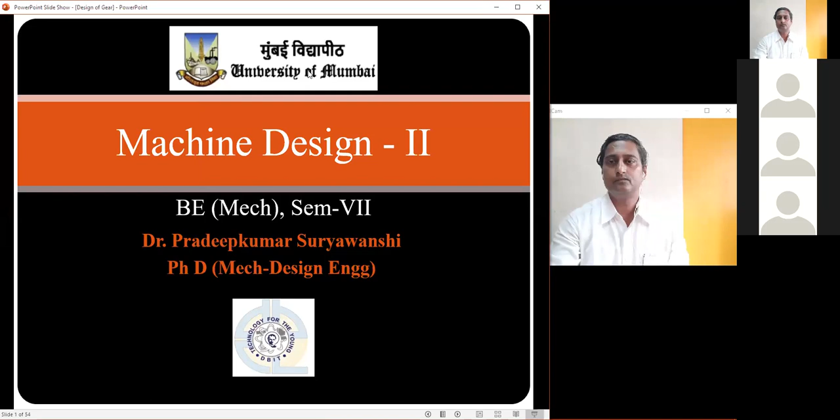Excuse me, sir. The video has frozen. Okay, let me just see what has happened. Yes, sir. Right. Okay, thanks for that feedback. Keep on doing this. Whenever I'm not audible or there is no video output, please let me know. That's fine. So we'll move on to my presentation now. Okay, that's fine. Actually I wanted to put this slide when I was making this introduction, but I just forgot. Anyways, we'll move on to the next slide. You can see my presentation? Yes, sir. Oh, it is not going. Yes.

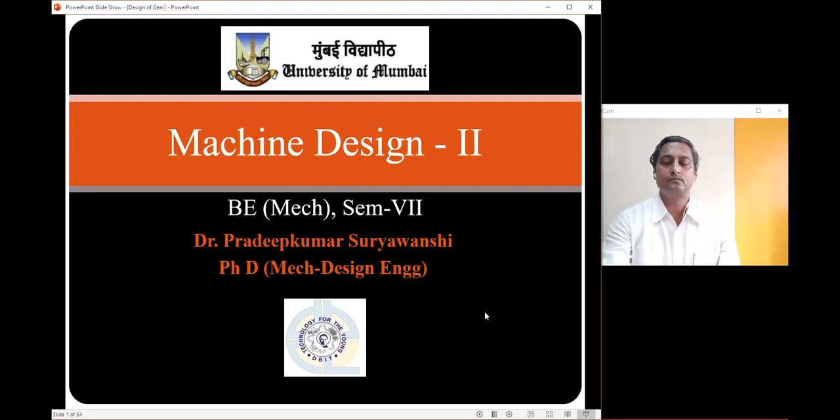Okay, so we'll just see what is the scheme for this subject. The course code is MEC 701, subject is Machine Design 2, and we will have 4 contact hours per week as a theory lecture for this subject. As far as the examination scheme is concerned, as usual we have internal assessment for 20 marks. There will be 2 tests; we will consider the average of that, and there is an end-semester examination of 80 marks for 3 hours. So in all, there are 100 marks assigned to the theory.

Then there is a lab course also, MEL 701, Machine Design 2, and 2 hours of contact per week is mentioned in the syllabus. We have 25 marks for term work and 25 marks for practical and oral. For practical and oral, a design task will be assigned to you, a sort of 1 hour test. You will solve the problem, and on the basis of that task, there will be an oral examination. That includes 15 marks for the design task and 10 marks for the oral. So in all, this subject contributes 150 marks to your total.

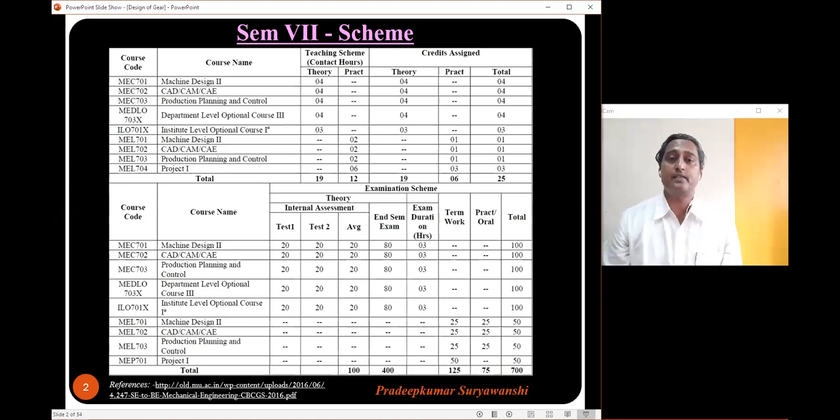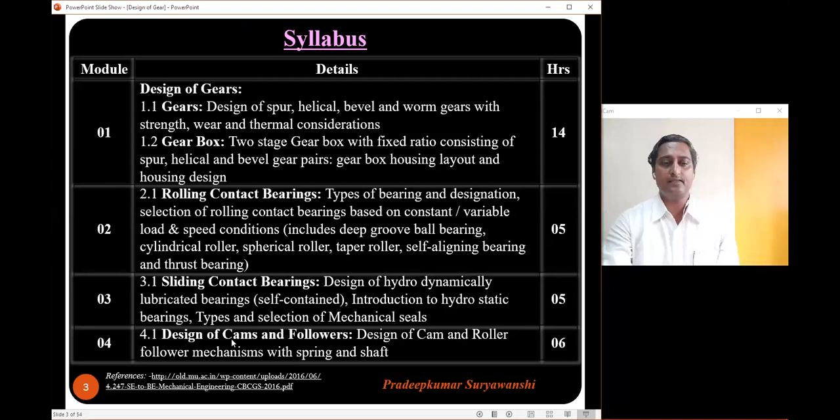We'll just take an overview of the syllabus. We have 6 modules. The first module is design of gears. Then we have rolling contact bearings, sliding contact bearings, and design of cams and followers. The fifth module is about design and selection of belts, design of flywheels, and design and selection of standard roller chains. And the last module is about design of clutches and brakes.

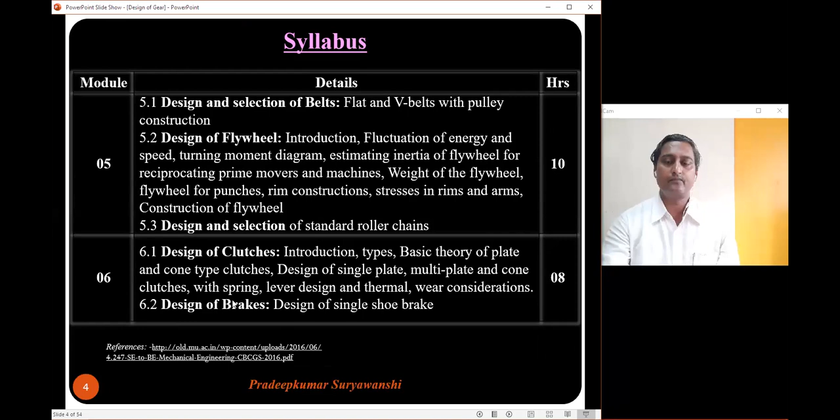As far as references are concerned, we will consider Design of Machine Elements by V.B. Bhandari as our textbook. Most of the content I am going to deliver will be from this book. Apart from this, I may sometimes rely on Mechanical Engineering Design by Shigley, sometimes on Faires. And very important, the recommended data book is the PSG design data book. We are going to solve problems with the help of the data book, so I strongly recommend you be ready with the data book so that you have practice using it.

Another observation of mine is that many times students become lethargic. They say, I will use the data book at the time of examination; I know from which page which formula is to be taken. But during examination time there is tension. You have to recall so many things, and if you are not conversant with the data book, it unnecessarily kills your time and leads to a more stressful situation. So I strongly recommend that you have a habit of using the design data book yourself. That is one of my instructions.

We'll quickly go through the objectives and outcomes of this particular subject, Machine Design 2. The objectives are to acquaint with functional and strength design principles of important machine elements. The second objective is to familiarize selection of standard elements such as rolling element bearings, belts, etc. And what are the outcomes of this subject?

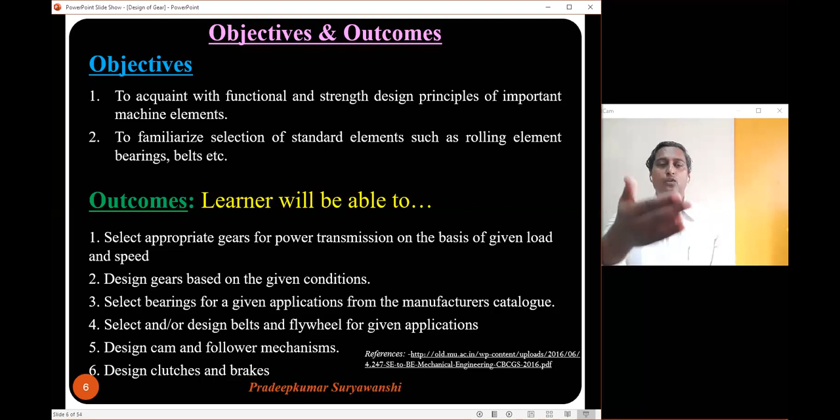At the end of the semester, if all of you are able to do these six tasks, then this overall teaching learning experience will be useful. Otherwise, to some extent we can consider it failed, but we will not allow it to fail. We will ensure that all of you are in a position to do all these tasks. So moving on to the first module, design of gears.

Before we actually go into design of gears, we need to understand a very important concept of mechanical drives. Mechanical drives are also known as power transmitting mechanisms. So what is a mechanical drive? It is defined as a mechanism which is intended to transmit mechanical power over a certain distance, usually involving a change in speed and torque.

Now, why do we require mechanical drives? I have listed 3 important reasons here. The first one is that we have prime movers at our disposal. Examples of prime movers are electric motors, IC engines, and turbines. All these prime movers run at a certain speed and develop a certain maximum torque and power.

But the machines connected to these prime movers require different torque and speed for their different operations during their range of operations. For example, if you look at this EOT crane, this is a diagram of an EOT crane, that is, an electrically operated overhead traveling crane. It is used for moving heavy loads within that particular assembly line or workshop from one place to another with the help of this hoisting mechanism, including this crane hook.

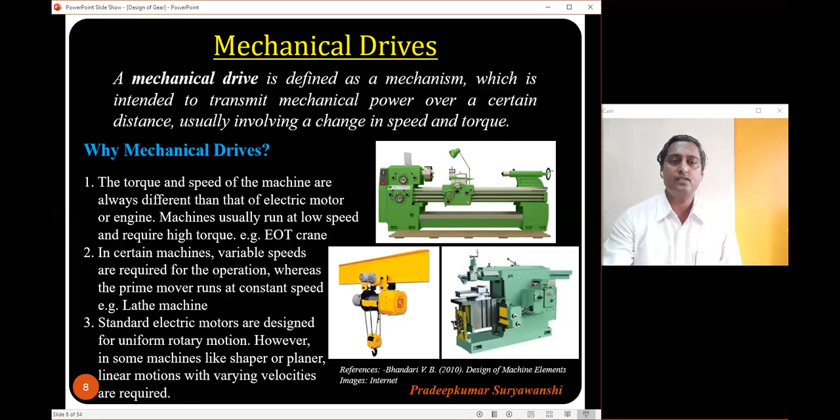Next, as I mentioned, the prime movers run with constant uniform rotary motion. But there are certain applications like the shaper and planer, as shown in this figure, which require linear motions with varying velocities. So we need some mechanism in place to transfer rotary motion into the reciprocating motion of this planer or shaper. So these are the reasons why we require mechanical drives. So how do we classify mechanical drives?

Now it's 40 minutes past 3 o'clock. The actual time assigned to this meeting is 45 minutes, so I don't know when it will end. I expect that Swati will take the attendance at this moment. Yes, sir, I saved the file. Yeah, that's fine. I will continue with my presentation. I heard that because this is our first meeting, it may extend to 1 hour also. I don't know. Yes, sir, it will.

But still, I think we will take a break of 10 or 15 minutes in between. Is that fine? Because we will go to 1 hour, and I have set another meeting at 4 o'clock, so we will lose some time and there will be some chaos. So just to stick with the current defined meetings, we will stop. First 2 meetings, sir, unlimited. Okay, then I should not have set the second meeting. Shall I cancel the second meeting and continue with this meeting for the next 1 hour? Yes, sir.

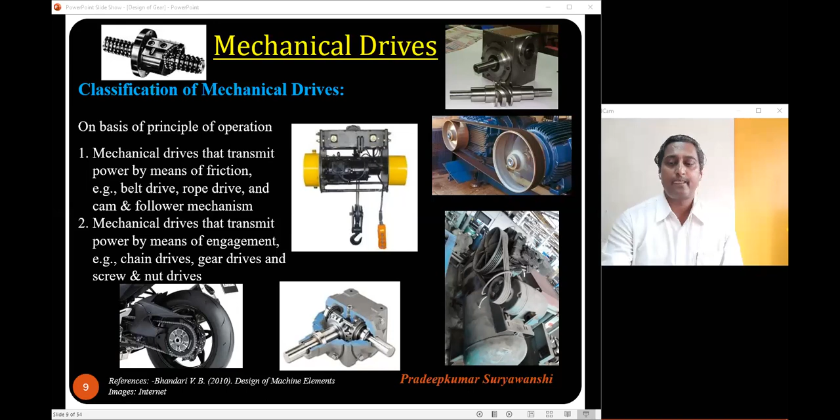So how do we select a proper mechanical drive? That is a very important task in front of a designer. There are certain factors, and depending upon these factors, we will select a proper mechanical drive. These factors are center distance, velocity ratio, shifting arrangements, maintenance considerations, and cost. On the basis of these factors, there are certain guidelines to select mechanical drives.

If you look at center distance, we can make use of flat belts and roller chains for long center distances. V belts are used for comparatively short center distances, whereas gear drives have the smallest center distance between the two shafts. Now all these characteristics have their own advantages and disadvantages.

The second criteria is velocity ratio. There are certain applications where we require the velocity ratio to be constant. Flat belts and chain drives are not suitable for this, whereas gear drives are preferred in applications where we require constant velocity ratio. But there are certain applications where a variation in speed is required, or there is slippage. In that case we can make use of flat belt and V belt for that purpose.

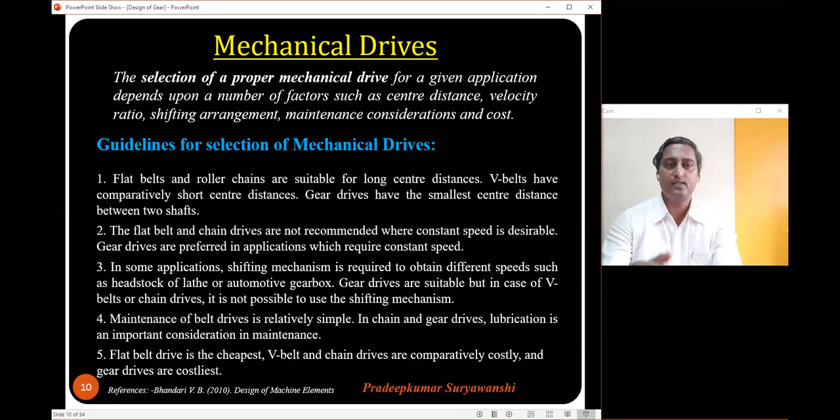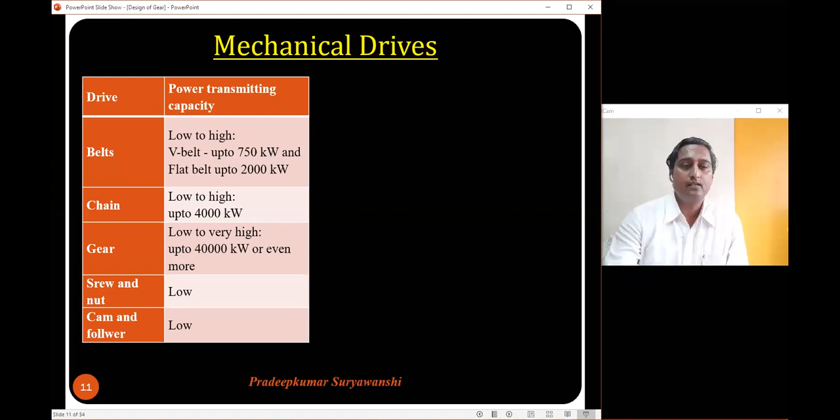Chain drives are again used for low to high applications, up to 4000 kilowatt. Gear drives are used for low to very high power transmitting applications, up to 40,000 kilowatt or even more. Whereas screw and nut and cam and follower drives are used for specific applications, and that too with low power transmitting capacity.

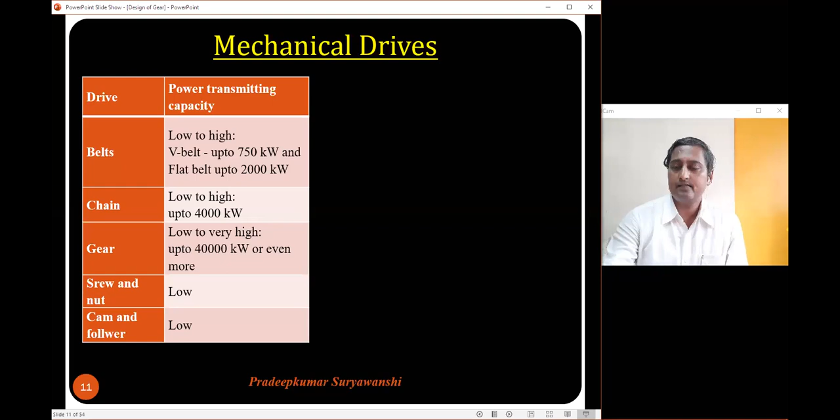So let us consider one exercise here. Just think for maybe 1 or 2 minutes: can you recommend a drive by considering all these guidelines for the situation wherein the prime mover is an induction motor with specifications 11 kilowatt and 960 rpm, and this motor is used to run a press, maybe a punching press or press brake, at a speed of 60 rpm? Can you think of some solution to this?

Actually, if we had been in a class, we could have done this exercise very nicely. But then I think I will continue with this.

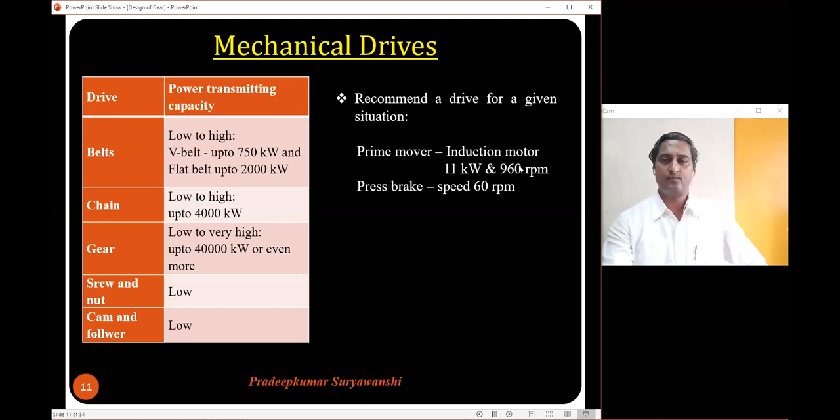I will explain how we come up with a required solution. It is only mentioned that you have a prime mover used for a press brake application, and the speed ratio is known. Input speed is 960 rpm, output speed is 60 rpm. So we can find the overall transmission ratio, or velocity ratio, to be specific: 960 upon 60 comes out to be 16. So 16 to 1 is the required velocity ratio.

We have so many mechanical drives at our disposal: belt, chain, gear, screw and nut, and cam and follower. We will assume that screw and nut and cam and follower are not applicable. That is our assumption: it is not possible to make use of these in this particular application.

Then we further make assumptions that the shafts are parallel. All the shafts involved are parallel. That is our assumption, because therein we can actually rule out the drives like worm and worm wheel or bevel gears, which are used in case of shafts that are intersecting or non-parallel. So that is another assumption.

Then we have three options. We can have belt drives, chain drives, or gear drives. But another important guideline in the selection of mechanical drives is that we need to look at the overall transmission ratio. The overall transmission ratio is 16, and this is very high. Generally it is mentioned that for a particular stage of power transmission, the velocity ratio should not be more than 6. If you increase velocity ratio beyond that, the size of elements involved increases, and therefore cost of material increases, and at the same time it becomes bulky.

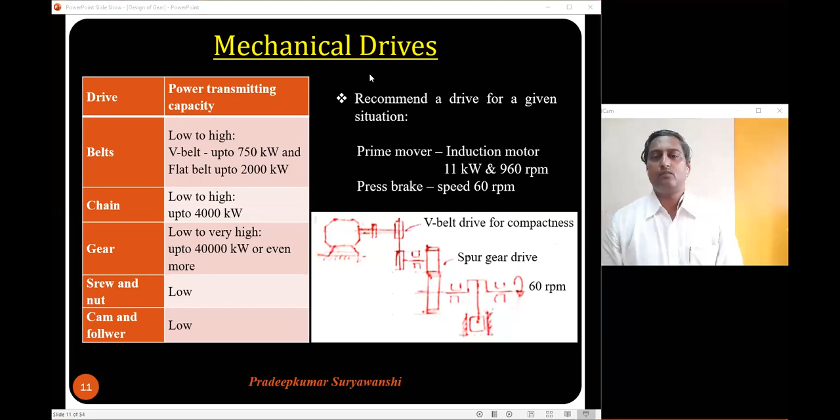So therefore we go for gear drives, and obviously the first choice will be spur gears because they are simplest compared to other gear drives. In this way we come up with a suitable mechanism on the basis of our own assumptions, understanding, experience and intuition, for this application where power is transmitted from electric motor to press brake. This is one solution. As you keep changing your assumptions, there will be different solutions. All these solutions may be valid; you have to take a call and justify your selections.

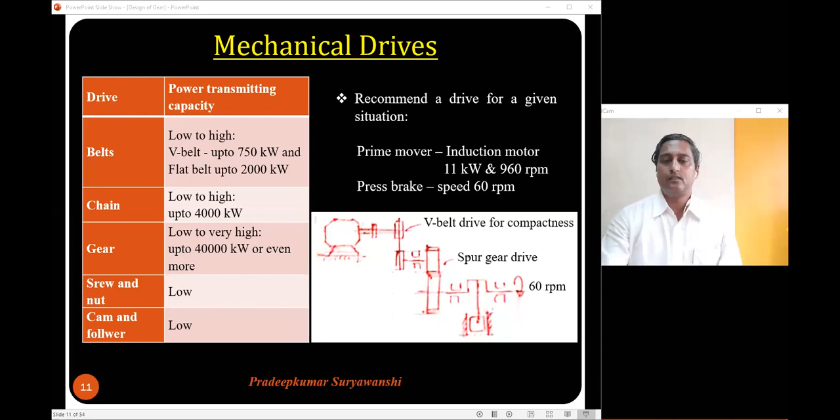Now we'll move on to the next slide. We now specifically go to gear drives, because we are discussing design of gears. Gear drives consist of gears. The elements of gear drives are gears, shafts, bearings, and some seals and housing of that drive. So the basic and very important element of this drive is gears.

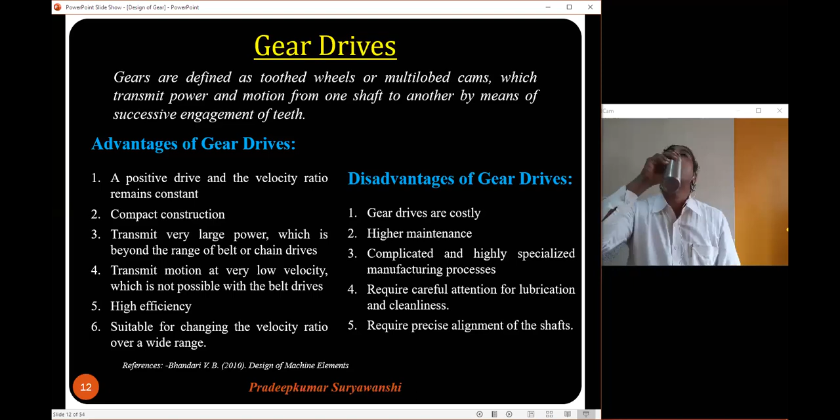So how do we define gears? You have already gone through this definition in kinematics of machinery, maybe in 4th semester. But for revision, we will discuss gears and advantages and disadvantages of gear drives. Gears are defined as toothed wheels or multi-lobed cams, which transmit power and motion from one shaft to another by means of successive engagement of teeth. This is very important. It's a positive drive because of this successive engagement of teeth.

So what are the advantages of gear drives compared to belt and chain drives? As I mentioned, it is a positive drive and the velocity ratio remains constant. The center to center distance is comparatively small, so the overall arrangement results in a compact construction. Gear drives can transmit very large power, beyond the range of belt or chain drives. They can transmit motion at a very slow velocity, which is not possible with belt drives.

It has very high efficiency. In case of spur gears, it is as high as around 99%. And it is suitable for changing the velocity ratio over a wide range by utilizing a suitable shifting mechanism. So these are the advantages of gear drives over belt and chain drives. Now we'll see the disadvantages.

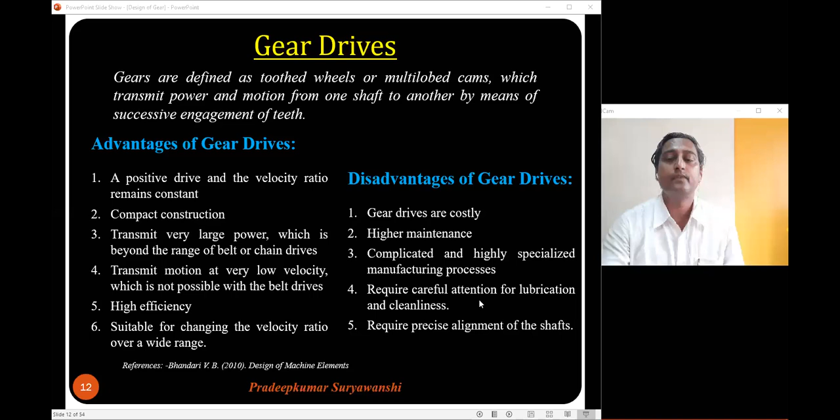Well, so we'll move on to the next slide, that is classification of gears. Okay, so in all, basically there are 4 types of gears: spur gears, helical gears, bevel gears, and worm gears. Okay, so we'll discuss one by one.

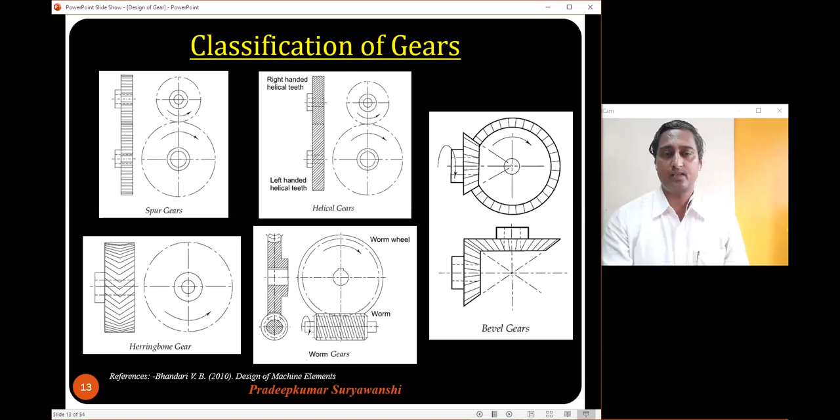Now we will actually start a proper design problem. So I want all of you to write this statement of the problem in your notebook. Design a two-stage gearbox to transmit 10 kilowatt power from an electric motor running at 1440 RPM to a machine with approximate overall reduction ratio 10:1.

So are you writing? I want all of you to write this statement because we are solving this problem. This type of problem can be asked for 20 marks. Yes, sir, writing. Okay, so if you are done, you let me know. We'll go ahead then. So you are done? Yes, sir, done. Well, very good.

As I mentioned, I want all of you to write this because this is a typical problem which we are going to solve, which will consist of design of spur and helical gears. Okay. So moving on to the next slide.

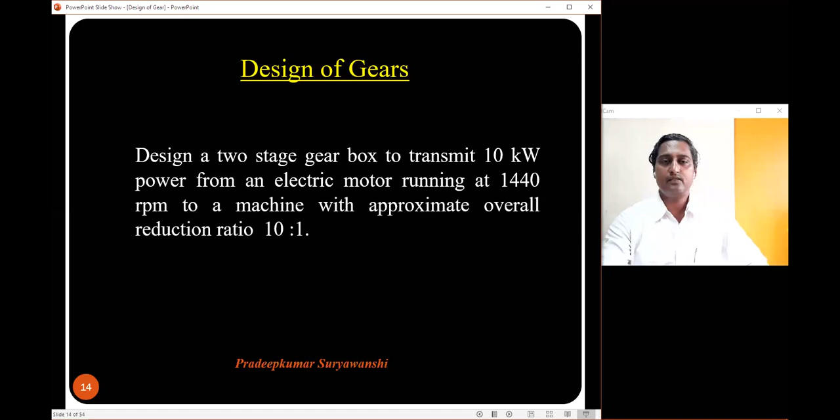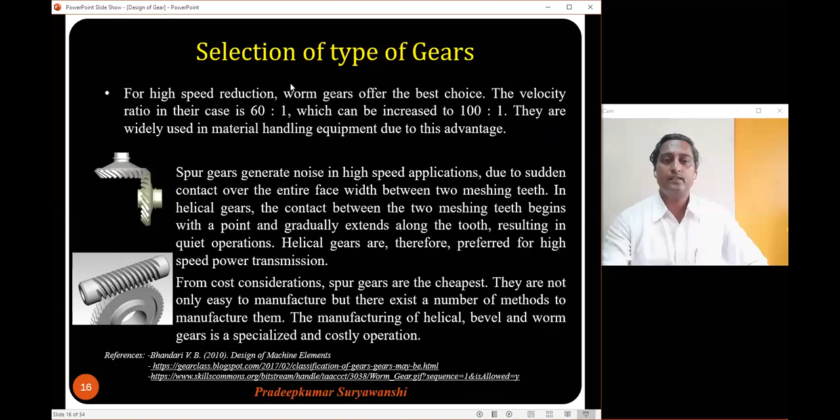I have already discussed how we select types of gears. So now we'll actually select. I expect all of you to write this as step number 1 in your solution: selection of type of gears. Write this as it is, and wherever I have mentioned a step in green color, that is the typical procedure you need to follow in your problem solution. If you collect these slides, that becomes a solution for the given problem.

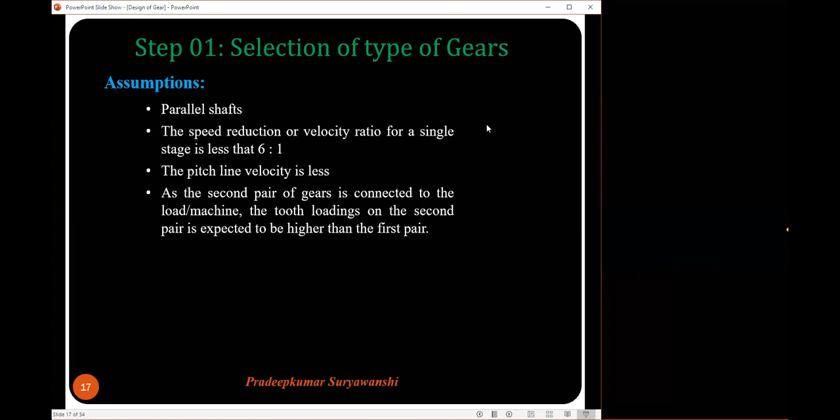Okay, so there is again some difficulty with my video. Let me just see what has happened. I'm not sure what has happened here. Just stop and start it. Hello? Hello? Yes, sir. You're able to hear me? Yes, sir, we can hear you. I thought we had come out of the meeting. Anyways, there is some difficulty with my video. I'll try one more time, otherwise I will just share the PPT itself and talk. I think it is connected now. Just give me a minute. There is some difficulty with the Wi-Fi. Why is it not connecting?

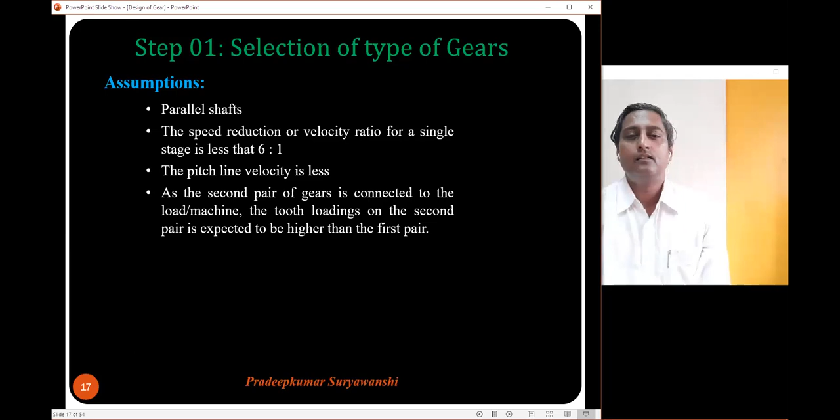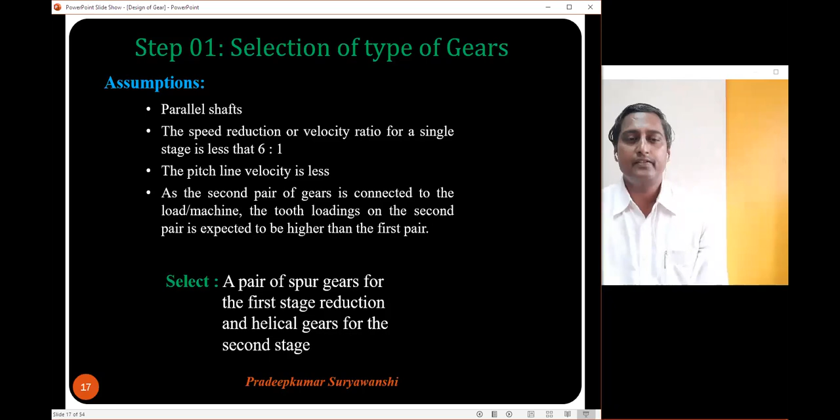Now which should be connected to the prime mover, and which pair of gears should be connected to the machine? As mentioned in the last assumption, the tooth loadings will be higher in the second pair. We will consider the helical gear pair as the pair of gears which is connected to the machine or load. Okay, so therefore note down these assumptions, scribble them down, and this is our selection. We will select a pair of spur gears for first stage reduction and helical gears for the second stage reduction. So write down this.

Now you can do it the other way around also. Because the first stage is connected to the prime mover, the speeds involved are high, right? So on that ground we can say helical gears are suitable for first stage reduction. That is also possible. But to build up the problem, because we have a proper well-derived derivation for design of spur gears, and on that we build and consider the design of helical gears, that is another convenience. Therefore I am considering spur gears as the first stage reduction, but that is just for convenience. It is not a criterion to select the type of gear in this problem or in that particular application.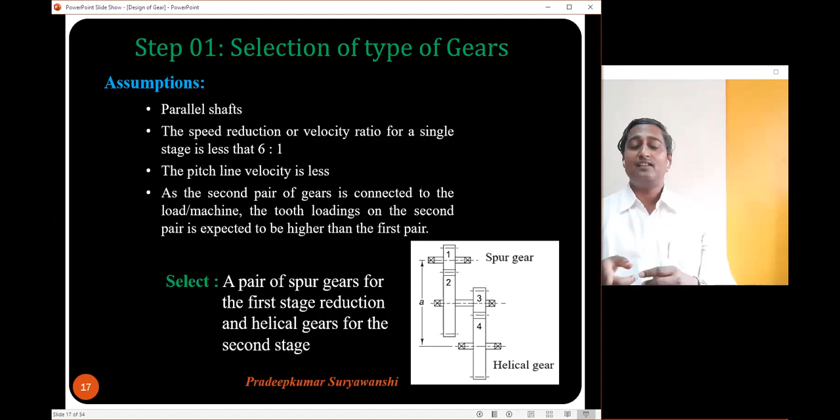Okay, so when we have selected a type of gear and two-stage gears, first stage as spur gears, second stage as helical gears, we need to go again through some of the basics related to spur gears. Some portion will be repeated. You might have gone through this completely, you might have derived these things, but again, it's better to revise here.

So we'll discuss the law of gearing. You have gone through this, I know it. The fundamental law of gearing says: the common normal to the tooth profile at the point of contact should always pass through a fixed point called the pitch point in order to obtain a constant velocity ratio.

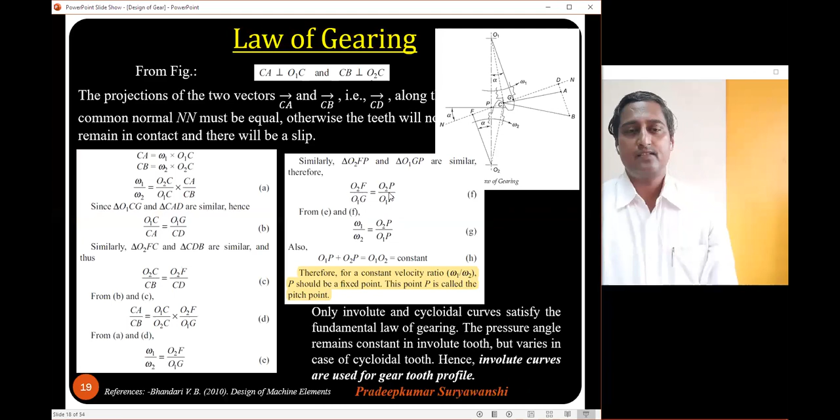Once again, I'll repeat: the common normal to the tooth profile, NN, at point of contact C, should always pass through a fixed point called the pitch point P. This point P is on the pitch circle diameters of gear 1 and 2. This is the requirement in order to have a constant velocity ratio. Now, how do we prove that?

Let's consider O1 and O2 as the centers of these two mating gears. C is the point of contact, NN is the common normal, and the line CA indicates the velocity vector when you consider point C on gear 1, because CA is perpendicular to the line joining C and O1. At the same time, the vector CB represents the velocity vector when you consider point C on gear 2.

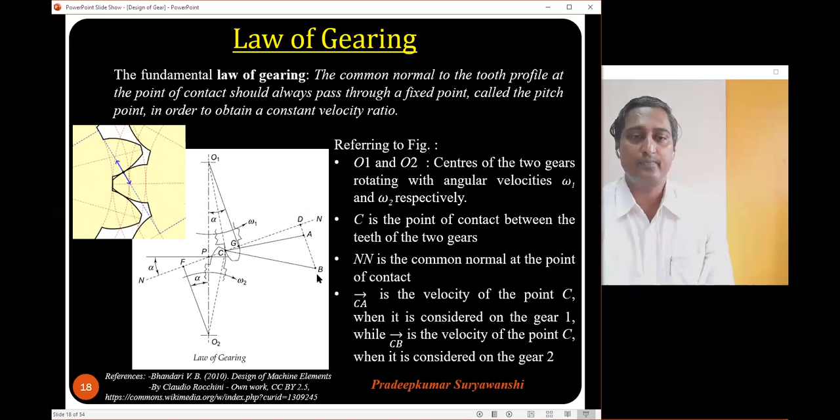Actually, there is some problem with the video, it appears. Are you able to hear me? Yes, sir. Okay, I'll continue then as it is.

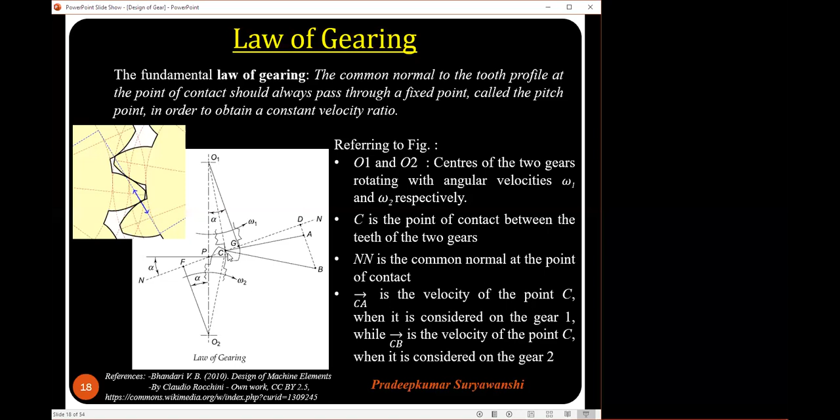So CB is the velocity vector when you consider point C on gear 2, and it is perpendicular to line O2C. I'll move on to the next slide. From this figure we see that CA is perpendicular to O1C and CB is perpendicular to O2C.

Now this is a very important statement. The projections of the two vectors CA and CB onto the common normal NN, represented by line CD, must be equal. This is the required condition. Why is it required? If it is not the case, then the teeth will not remain in contact and there will be slip.

Now we can represent the velocity vector CA, which is a tangential velocity on the pitch circle of O1, as V equals R omega. Omega 1 is the angular speed at which gear O1 rotates about its center, and O1C is the radius. So CA equals omega 1 into O1C, and similarly CB equals omega 2 into O2C. Taking the ratio of these two, we get omega 1 upon omega 2 as this expression.

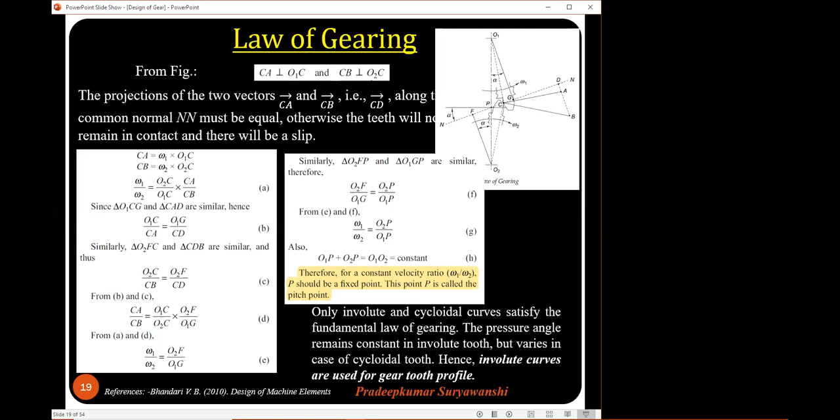There is again something called as diametral pitch. It is defined as number of teeth upon diameter of that particular gear, so z upon d prime. Another very important term in relation to the gears is module, and it is defined as inverse of the diametral pitch. So module is defined as ratio of the pitch circle diameter to number of teeth.

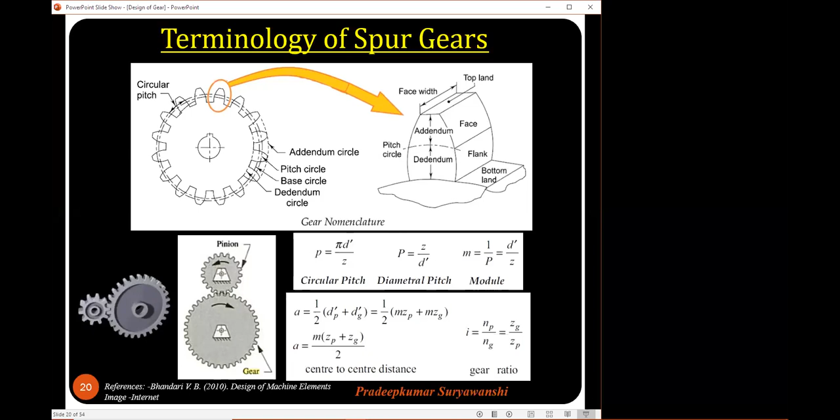All involute gears of given module and pressure angle are completely interchangeable. This is very important. They are interchangeable and suitable for mass production. All involute gears of a given module and pressure angle can be machined from one single tool. This is again from the same consideration, mass production, and one single tool is required for manufacturing both gear and pinion, or mating gears as such.

The basic rack of an involute profile has straight sides. So what is the benefit of this? Before I discuss that, if you keep on increasing the radius of a particular gear, it is observed that the involute curve becomes straighter and straighter. As you go towards infinity, if you assume the diameter of that gear is infinite, the involute profile will become a proper straight line. That's the meaning of this basic rack. I will show on the next slide what this basic rack is.

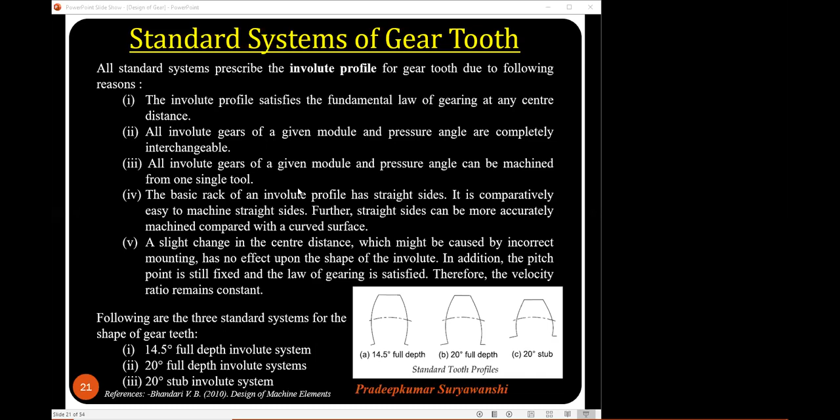Therefore all standard systems of gear tooth recommend the involute profile for the tooth profile. We have 3 standard systems: 14.5 degree full depth involute system, 20 degree full depth involute system, and 20 degree stub involute system. We'll go through these systems quickly.

The basic rack I was mentioning on the previous slide is shown here. These are the 3 different basic racks for the 3 standard systems for gear tooth. In the 14.5 degree full depth involute system, the minimum number of teeth on the pinion to avoid interference is 32, and its major advantage is quieter operation. However, 20 degree full depth involute has certain advantages over that, so the generally recommended system is the 20 degree full depth involute system.

Nowadays people actually go for the 20 degree stub tooth involute system, but as per the syllabus, we will consider the 20 degree full depth involute system. In this system, the minimum number of teeth on the pinion to avoid interference is 17. It is also recommended by the Bureau of Indian Standards and widely used in practice.

So what are the advantages of this system over the 14.5 degree pressure angle system? It reduces risk of undercutting and interference due to increased pressure angle, increased from 14.5 to 20. The tooth becomes slightly broader at the root, which makes the tooth stronger and increases the load carrying capacity. This is an important benefit of the 20 degree full depth involute system.

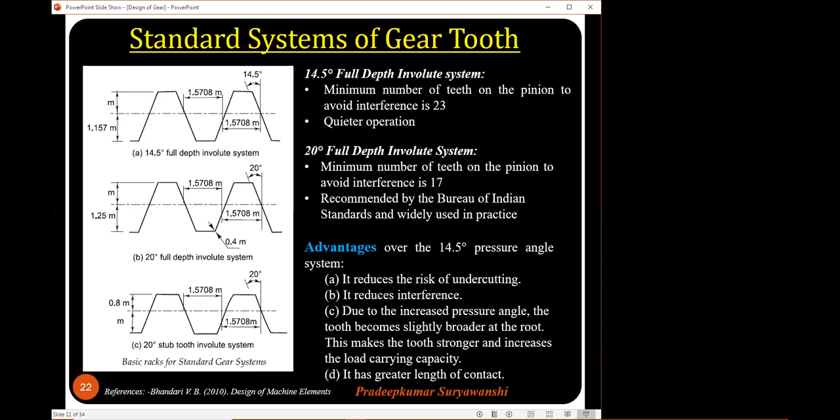Well, module and size of the gear tooth. Module has very prominent effect on size of the gear tooth, because the way we define module is it is the ratio of pitch circle diameter to number of teeth. So as the module increases, the size of gear tooth increases, and hence module is considered as the index of size of the gear tooth.